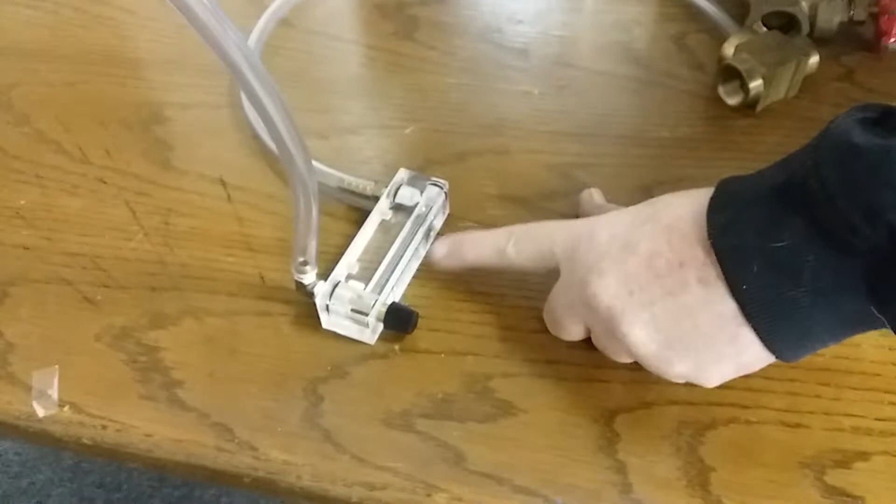Now we all know - I've got a drawing up here, but I'm going to go over a couple things so you get familiar with what we're doing here. Okay, so we all have a chemical injection jug, and we all have a chemical flow meter. This chemical flow meter has a shut-off knob and an adjustment knob, so you can adjust the flow, plus you can shut it off. If yours does not have that, you just need to put an inline needle valve right here between the flow meter and the jug. So then we all have water boxes, right?

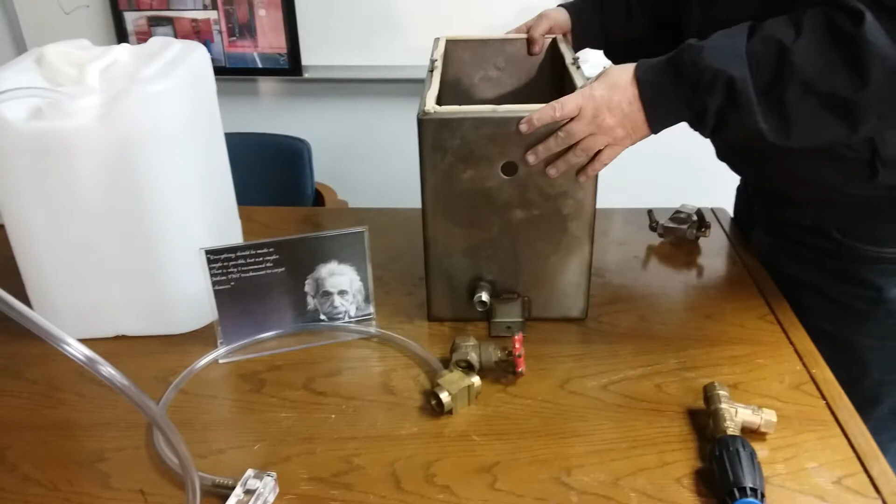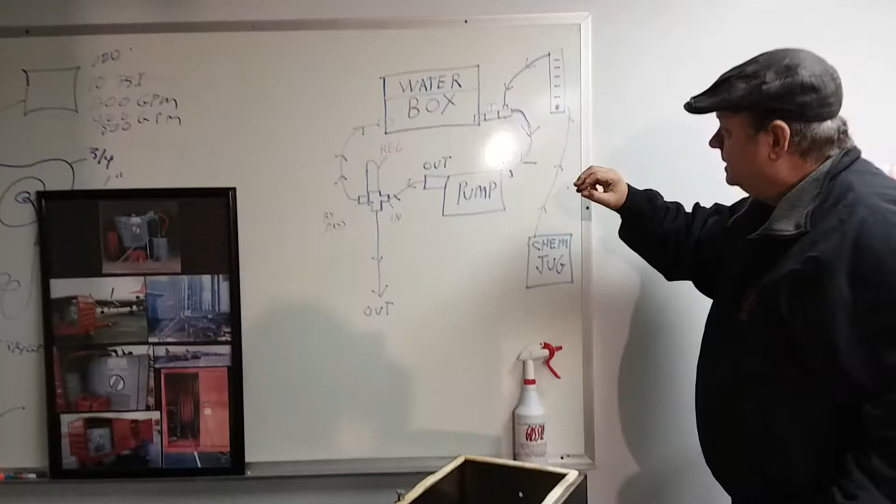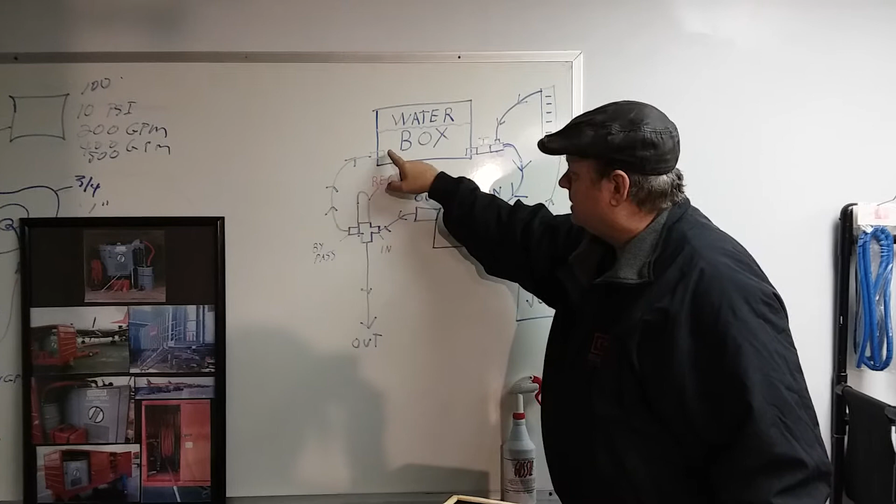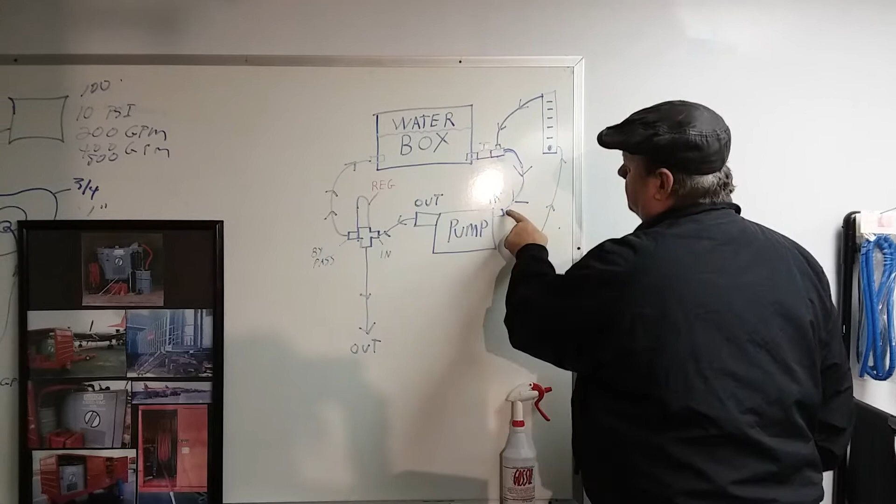On your water box, you're going to have an inlet going to the pump inlet, which will be the outlet on the box, and then you're always going to have a bypass line that usually returns back to the bypass of the box. Now sometimes on this drawing here, the bypass - here's the regulator, there's the pump out, high pressure out, then there's always a bypass, and we return it back to the water box. Now sometimes you'll see in a lot of designs is this way, guys - sometimes the bypass is coming back to the pump inlet with a T. Now I'll give you the advantages and disadvantages of doing that right there.

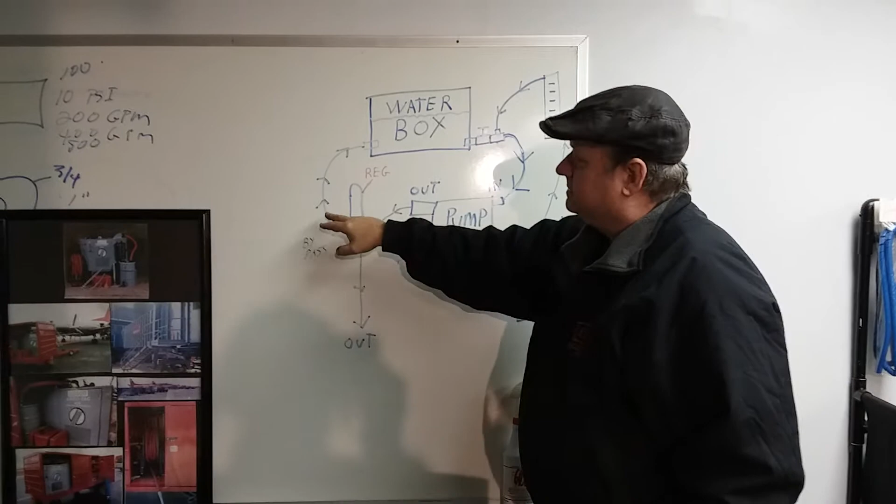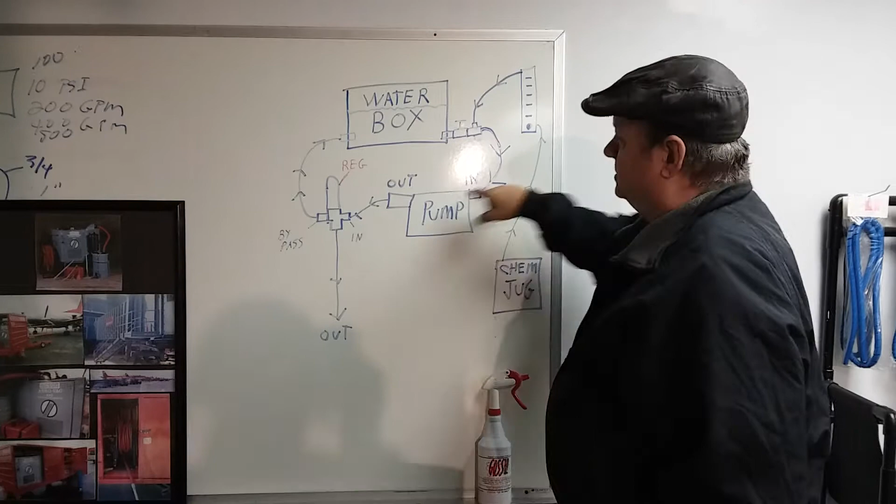If I bypass back to this water box, and this water box has 3-4 gallons of cold water, and it's just circulating - look at that, 3-4 gallons - you let go of the trigger, it goes into bypass mode, look at that, just flowing around 3-4 gallons of cold water. Well, let's say you're doing a flood job and the employee doesn't turn the pump off - well, guess what? No big deal, it's just circulating a bunch of cold water. So now let's say air gets in the pump - well, look here, it just blows it into this water. The bubbles just float to the surface, so it keeps the system primed.

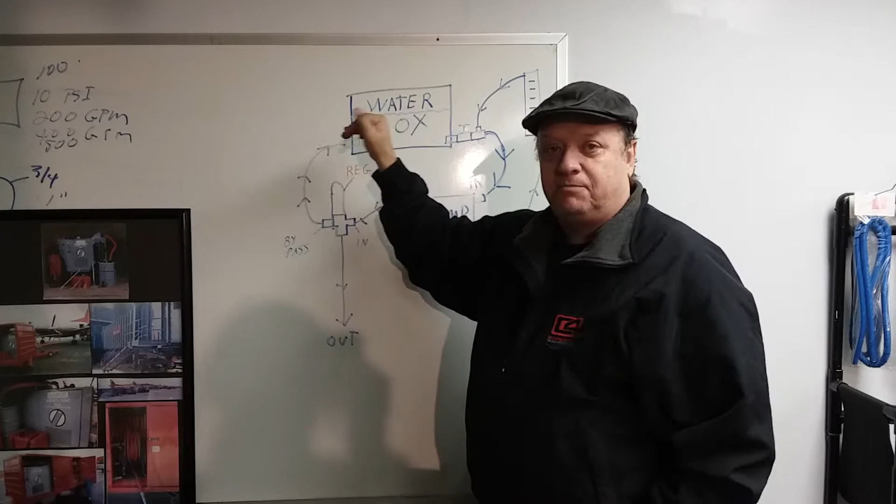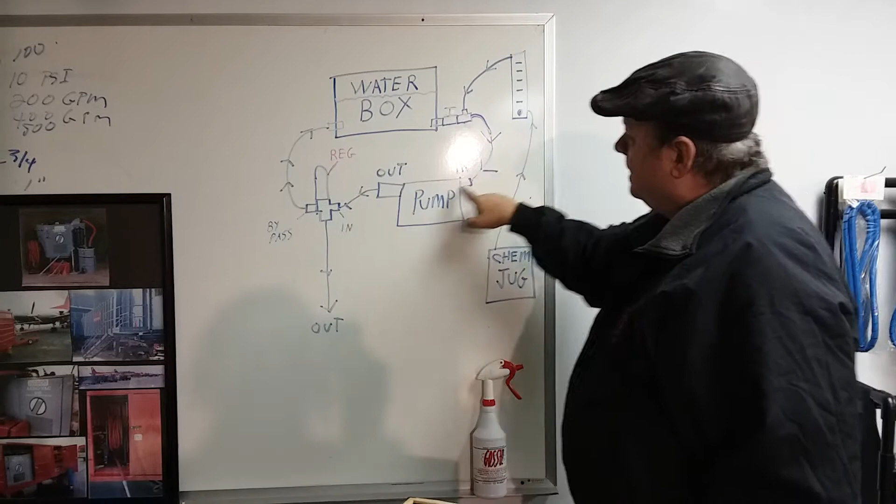If we're bypassing back to the pump inlet, we're now only circulating about 16 to 20 ounces of water. Every time it makes a pass, it starts getting hot, and it starts getting hot, so it doesn't take long to go to steam. That's why you'll see these inline thermal relief valves. But see, we don't even have that.

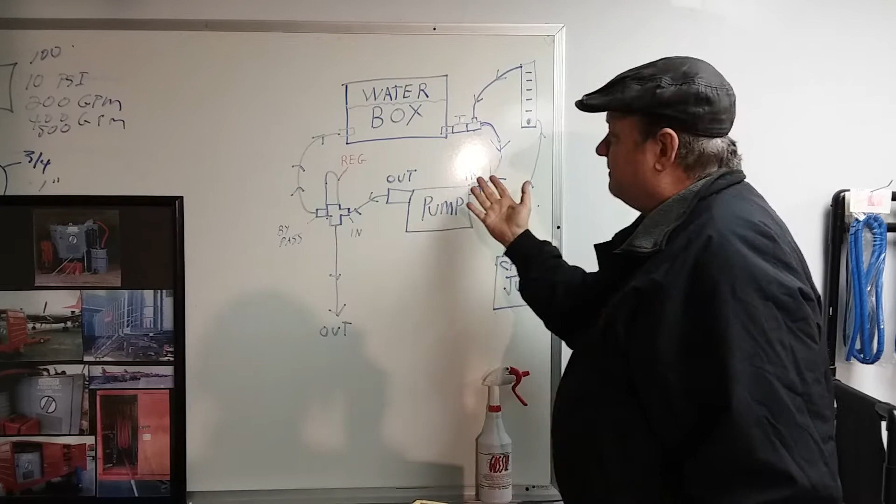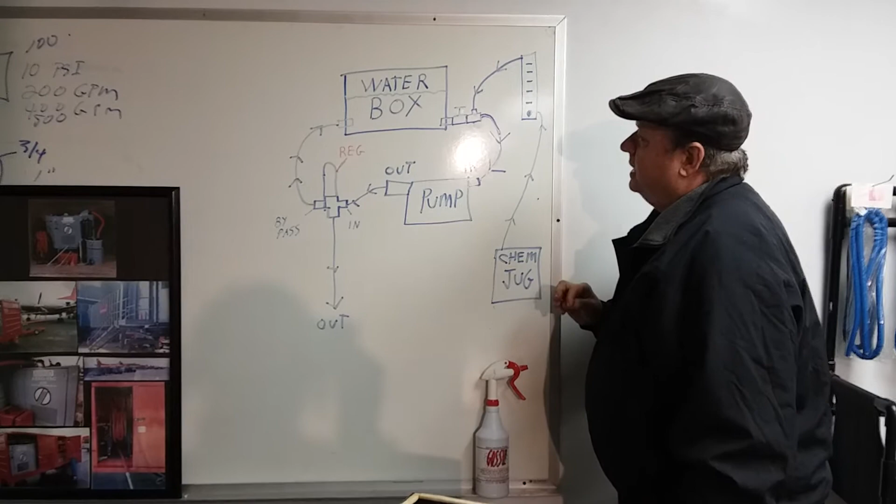So now, if we got air in the system, guess what? If we're bypassing back to the pump inlet, we threw the air right back in the pump. So this is the way we do it. And it's not the most accurate, but we're just injecting water softener.

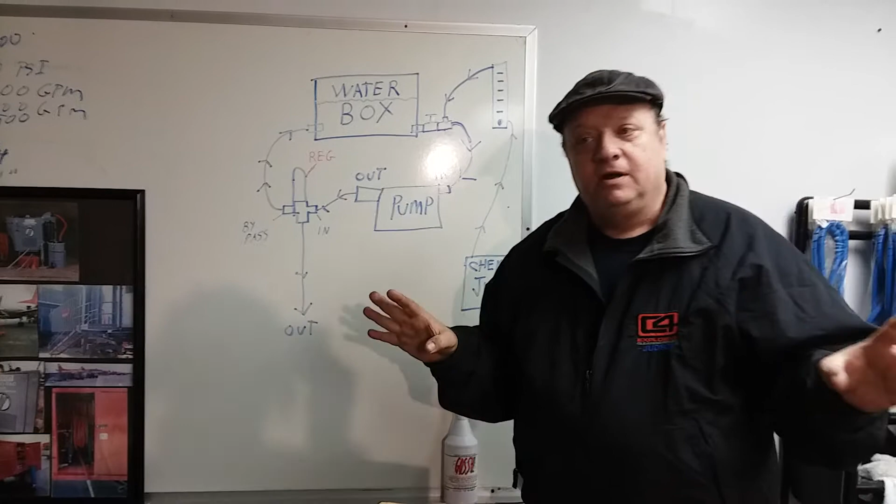We don't need to be running any acids in these truck mounts at all, ever. That's one of the issues I'm going to address this year, this acid rinse business of neutralizing the pre-spray. Obviously, you're not supposed to use a pre-spray that needs neutralizing. There's a reason why there is - it's because the cost of raw materials have gone up. And I can make you a gallon of high pH pre-spray for $3. I might make some to prove my point on this deal.

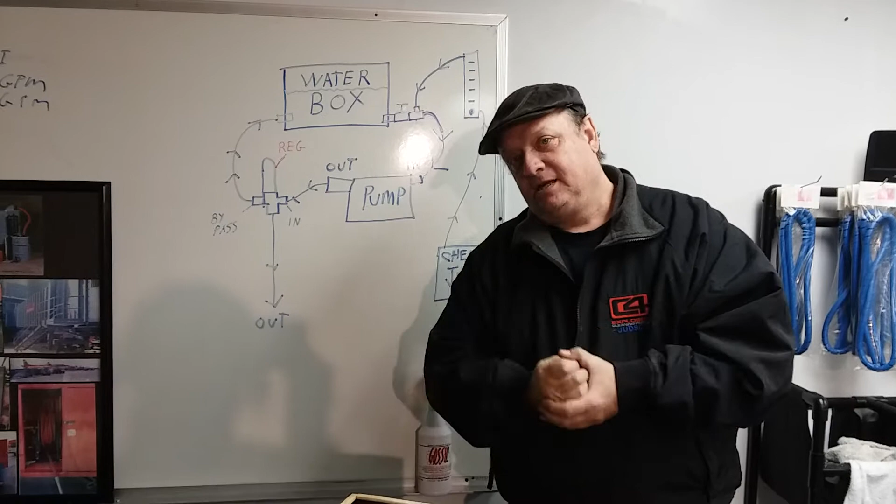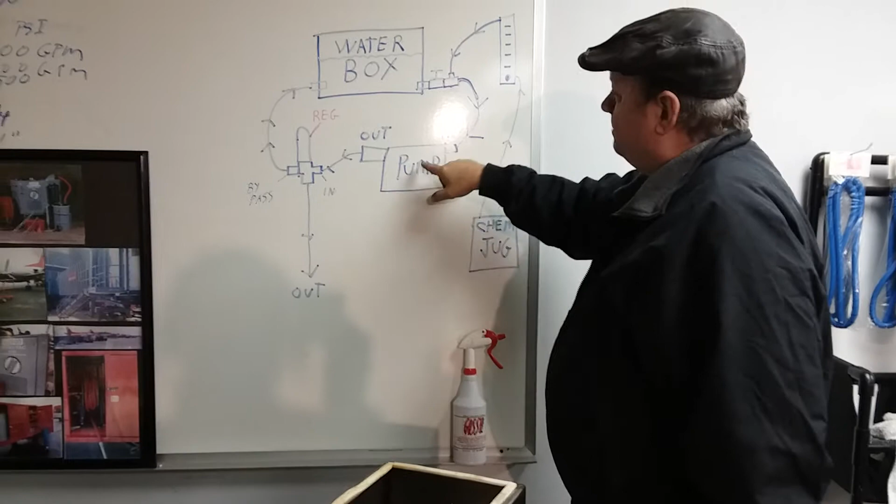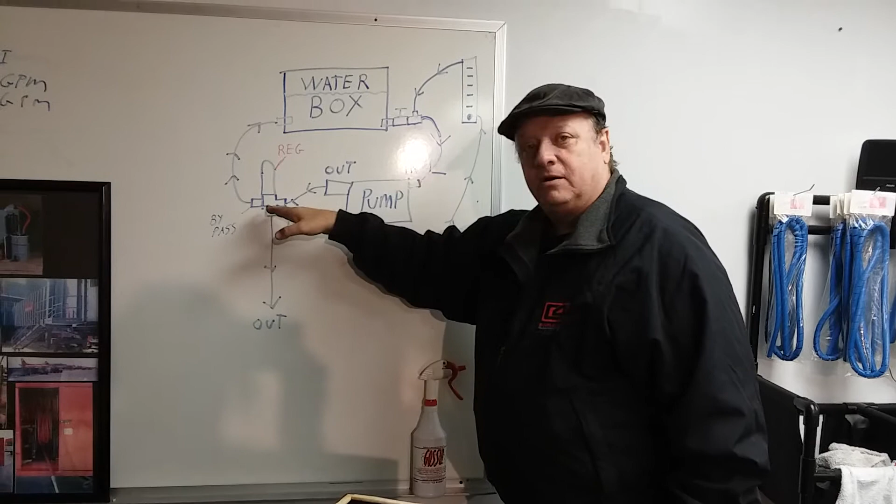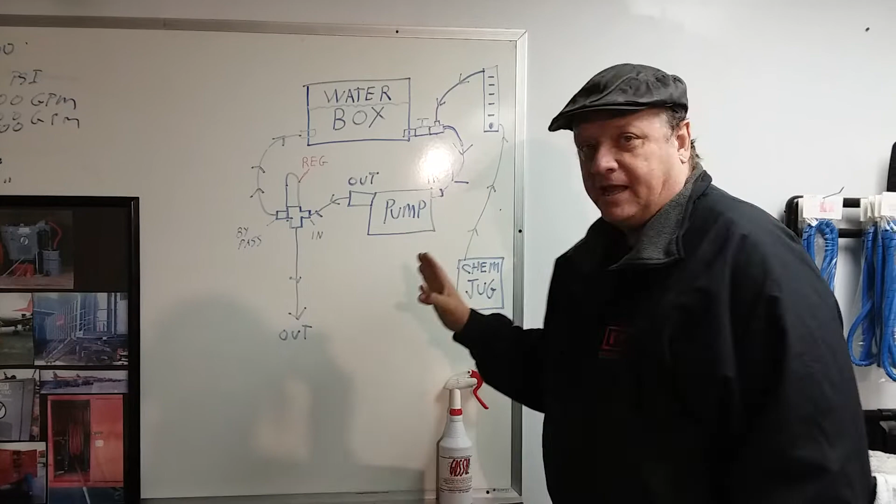But anyway, back to what we got here. So we want to run a water softener through there. Our water softener that we make lubricates that pump like a 2-stroke engine putting gas and oil together. That's why Judson offers a 10-year pump seal warranty and 10-year regulator warranty. That's because we are pumping cold water, it stays primed, and we're lubricating the pump seals and the regulator with our water softener that breaks down the surface tension, which is all you're supposed to run through a truck mount. I don't care what anybody claims - there's a reason they're claiming other stuff.

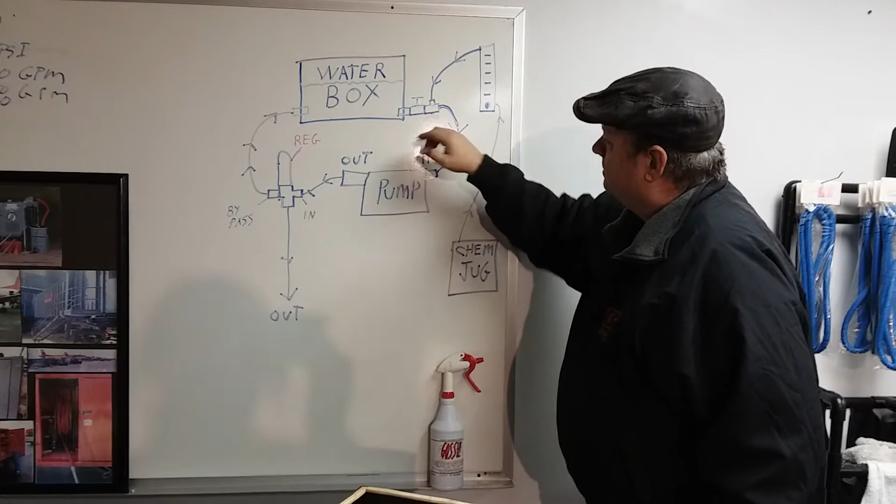Now here's the top of the flow meter. There's your chemical jug. You can stop this and just look at this, and then we're going to go over the resistance here that makes it draw the chemical.

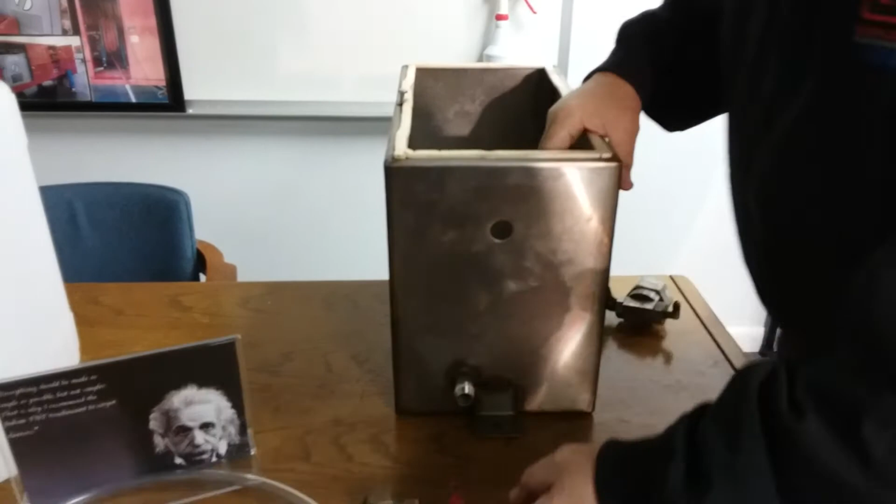So let's go back over here, down here. Now we have the water box. So what we do is we put a T on the water box, and then we put an adjustable gate valve.

Now look at this - this is from Home Depot. You can get these in different sizes. I just had it in the back. I was going to go get the right size, but I'm going to make the video. And you see how that just adjusts. So we put that in line, and then that goes to the pump.

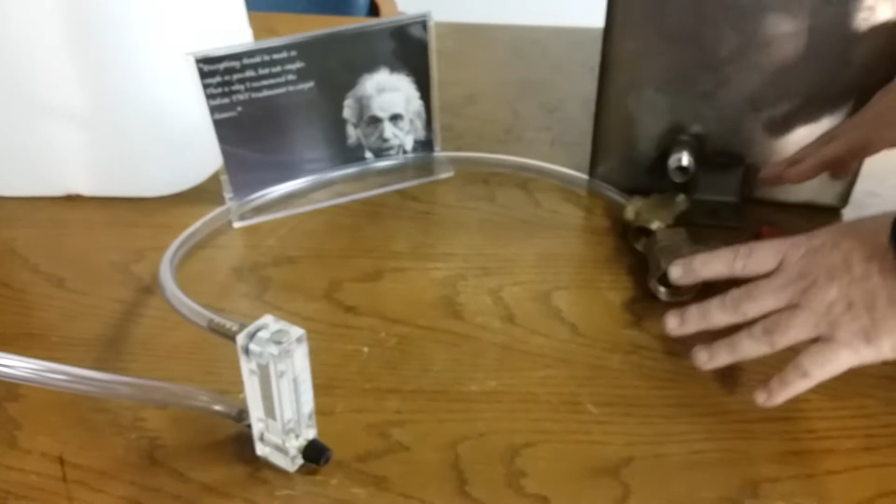So now we can adjust the resistance. If the flow meter is real sensitive, you can back this off and make it where it just barely goes to the top of 5. So this allows you to adjust for different flow pumps and also the sensitivity - it takes the sensitivity out of the flow meter. So that's how you put that little water valve in there, and then you've got an adjustment.

Now one thing I want to tell you about this - make sure you tighten this nut down right here. It's prone to suck air right through here and give you problems. That's the one thing I don't like about it.

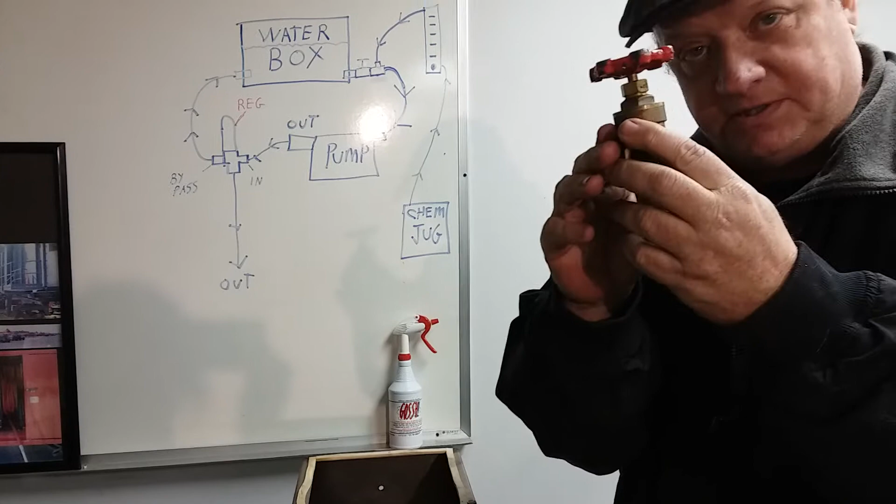Now, Judson factory truck mounts don't use these, but this is a great way of doing a retrofit of an existing system because we don't know what flow your pump is. Now let me show you what Judson does.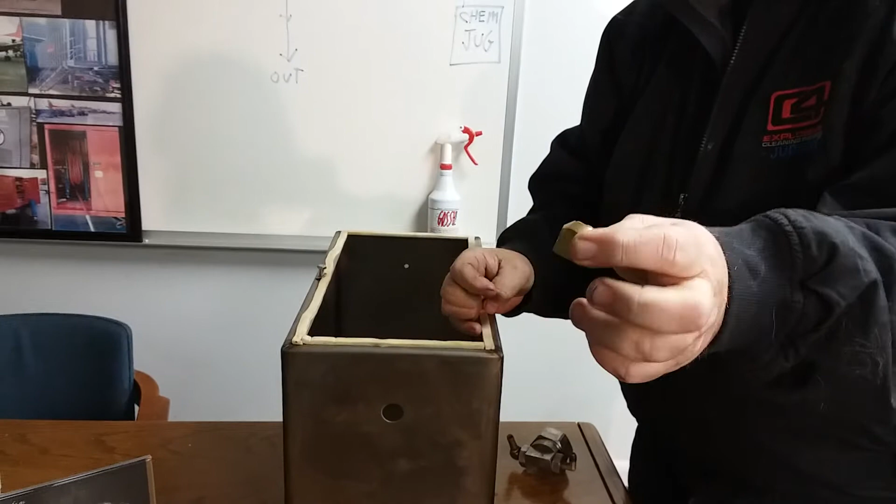Instead of using the gate valve, we have a preset on the inside where the filter is. I'll just back up a little bit. We have a hole drilled in this resistance, and that is what gives us a steady resistance. So we know what our gallons per minute is of the pump depending on the RPM of the pump and what the pump flows at, and then we adjust this hole to take the sensitivity out of the flow meter.

Okay, so you can do that too. You just start off with a small hole, keep drilling bigger until what you want is the ball just to barely make it to 5 or a little over. You don't want it to where you just barely touch this adjustment and it shoots up to the top - that takes the sensitivity out of it.

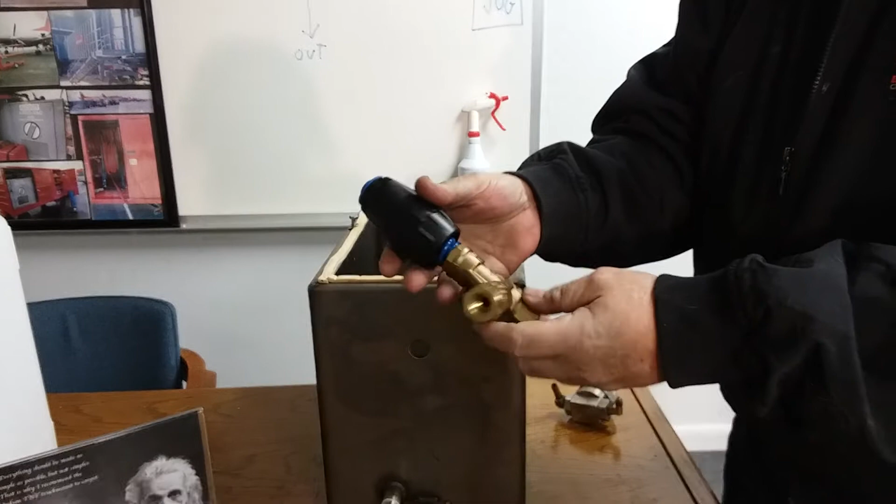You've got a regulator here - it could be panel mounted. Pressure comes into the regulator, and then we have pressure out, goes to the heating system - it could be a heat exchanger - out to the wand. Then there's our bypass. I was talking about returning to this tank, so it circulates all that cold water.

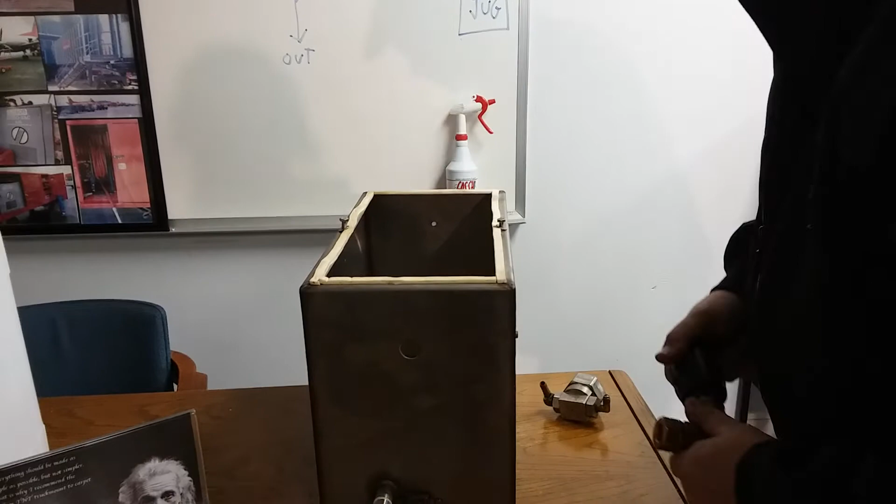So it's pretty simple. I don't know if this is going to help you guys or if it's real confusing. I'm trying to make it as simple as possible. I was going to get some different stuff from Lowe's or Home Depot - that's where you get these parts. That's one thing we like about it, is we get these parts from Home Depot or Lowe's, these fittings here.

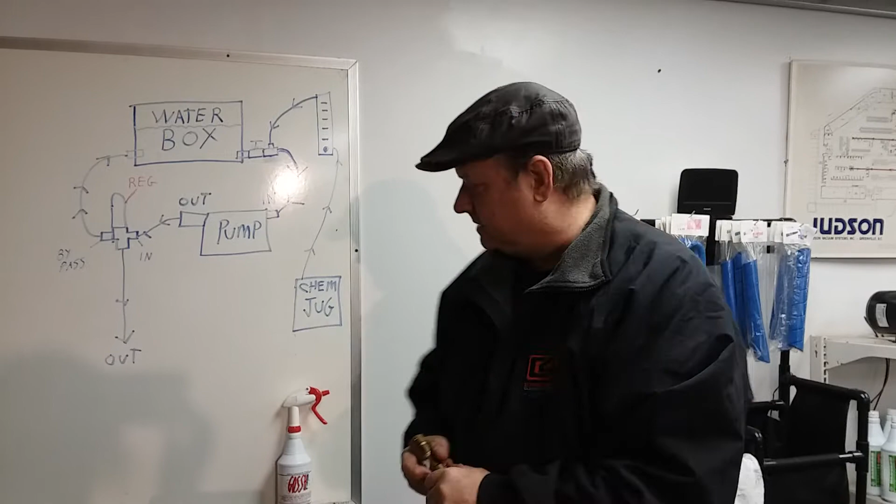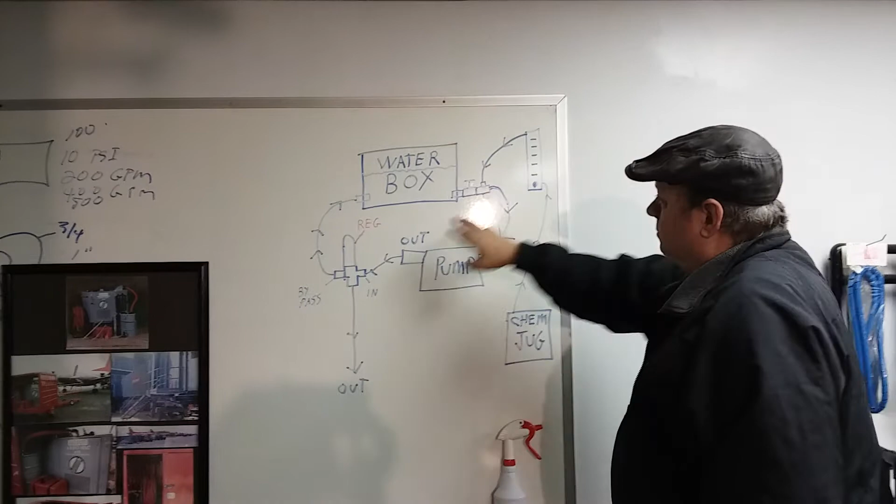So I'll go back over it. Got your water box, you know what the flow meter is. So we'll go back over it one more time, just real fast - your water box, you put the gate valve.

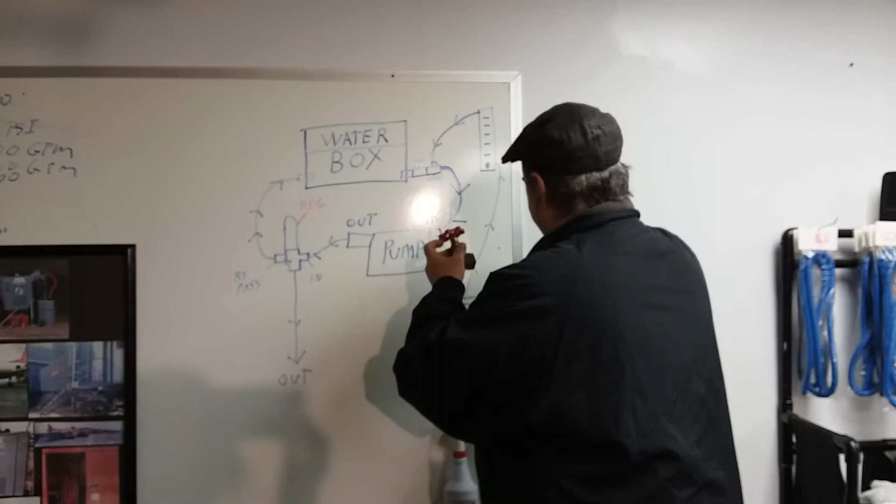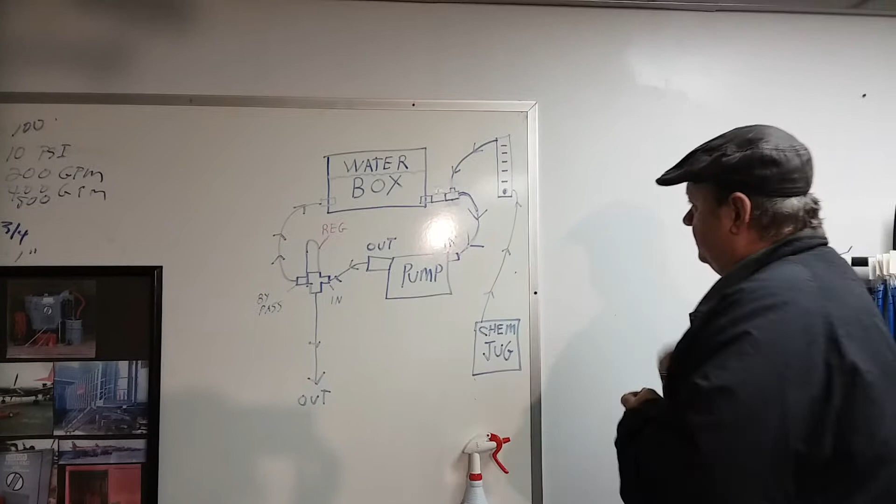Excuse me. Put the gate valve here. I got that drawn wrong. Anyway, the gate valve goes... let me see, no, I got it right. Yes, the gate valve goes first, then your T.

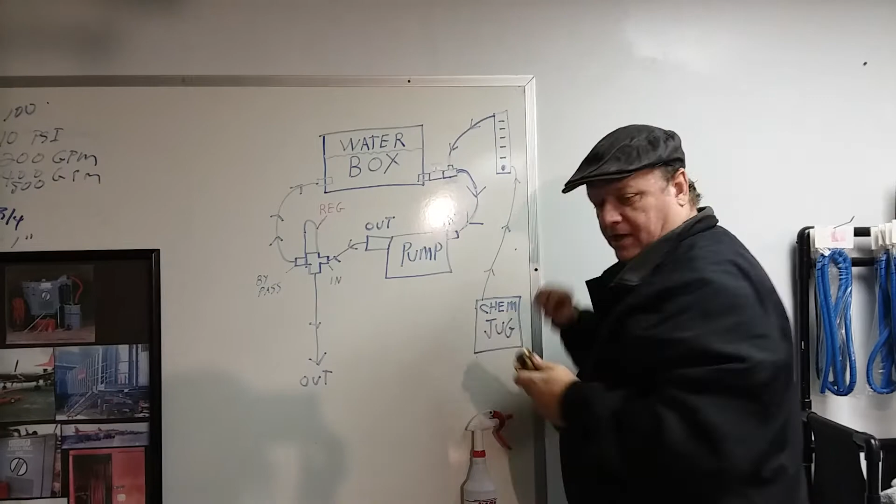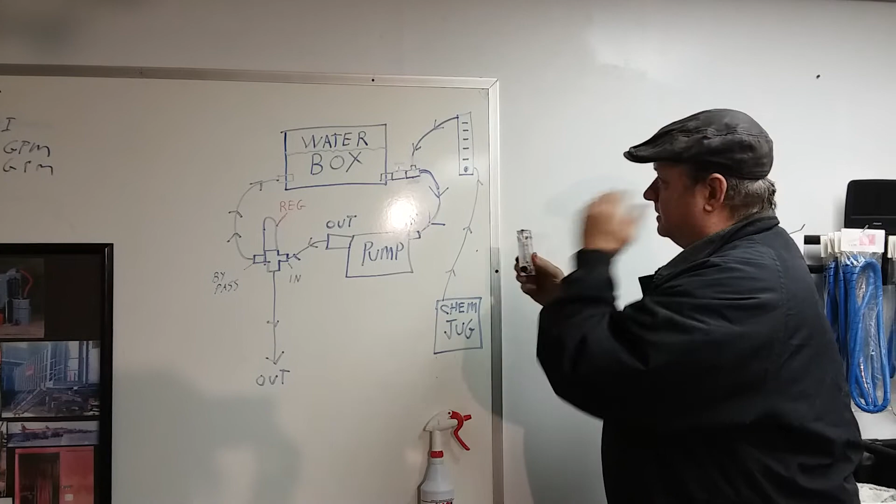And then this allows the resistance, and that's how you control the pull or the draw of the chemical out of here. Then you've got your little knob on your flow meter. Now, on the flow meter, you may not have a knob. You'll have to put a valve in line here to control the flow meter, the little needle valve. Most everybody's got it. You're either going to have a flow meter with a knob or without a knob, and usually they'll have some type of needle valve.

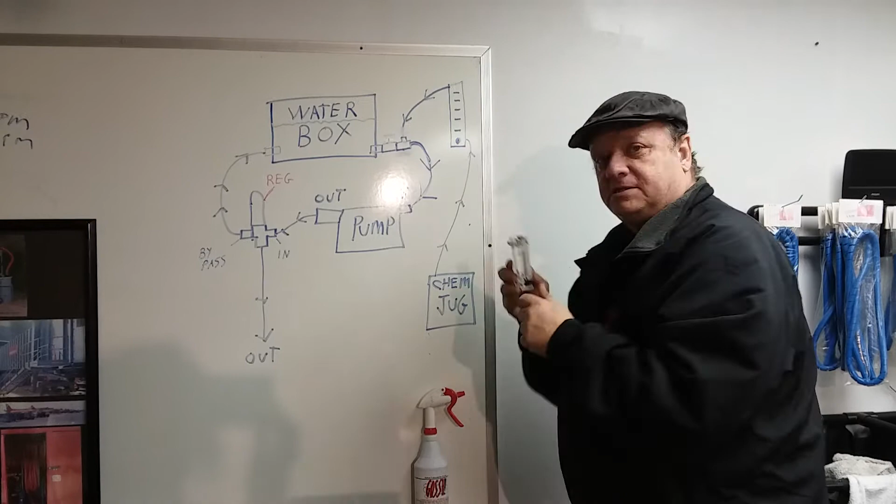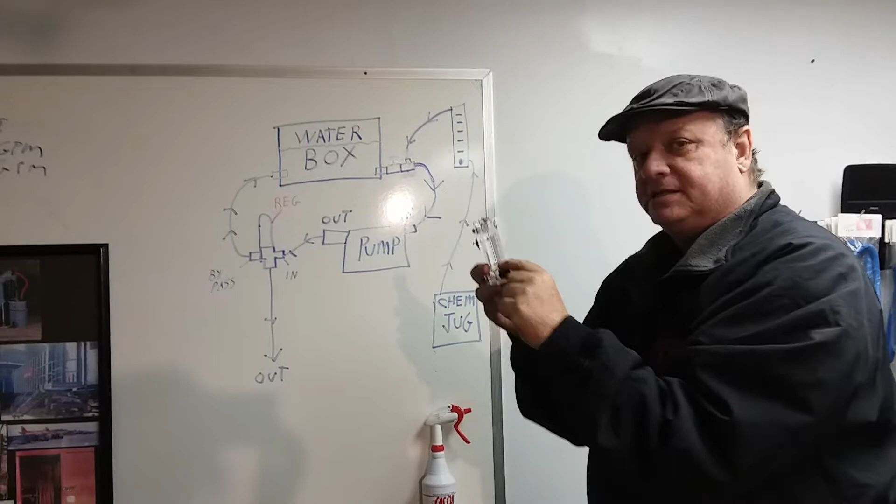Now, you are going to have to turn this off at the end of the day because it will siphon back into the system. This system does draw at all times. In other words, it's always going to draw, but we're injecting such a little bit of chemical per gallon. If you laid the wand down for like 30, 45 minutes, yes, it'll build up some strength in the chemical, but we're just running water softeners, so that's not going to be a big deal.

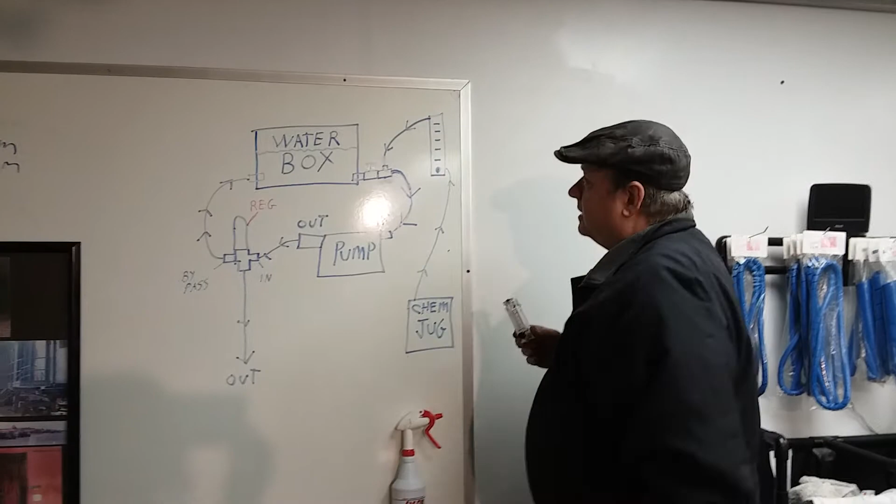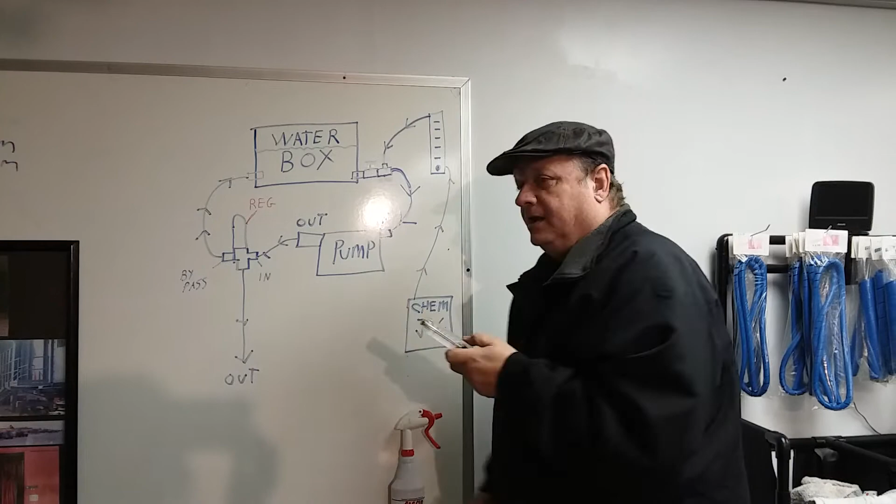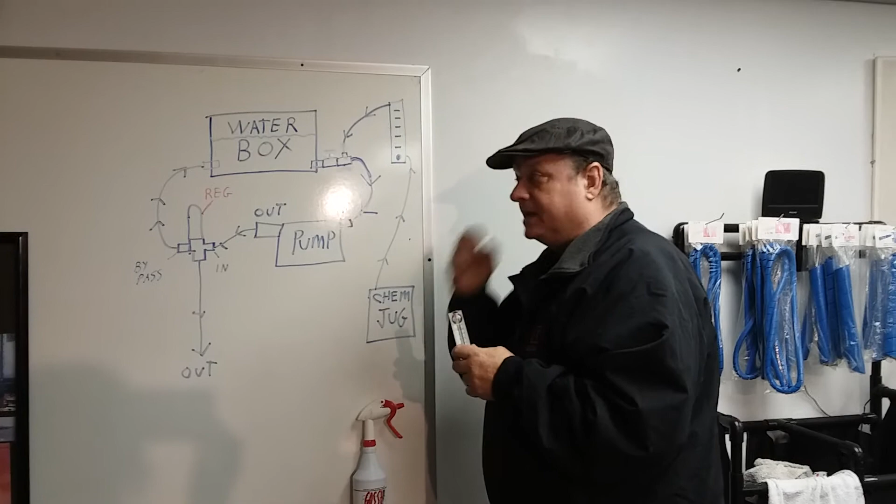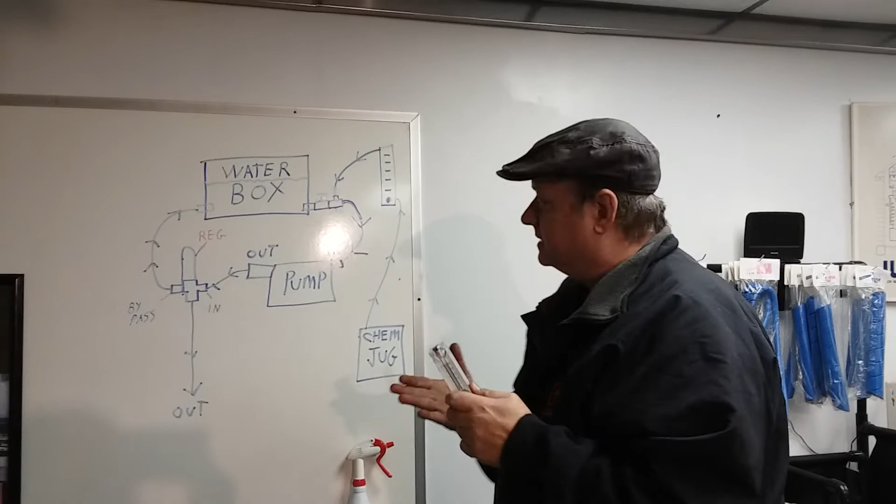Now, I do not suggest any acid rinses. I'll go over what that's all about, and it's about having the wrong pre-spray. Anything over like 9.8 is not a carpet cleaning pre-spray, it's a hard floor cleaner, and it should be used for a hard floor cleaner. You don't have to use high pH to clean carpets, but it's very expensive to manufacture a low pH chemical that performs, and that's what we specialize in, because that was the correct type of pre-spray. There's lots of stuff out there now, lots of caustic soda being pushed on carpet cleaners.

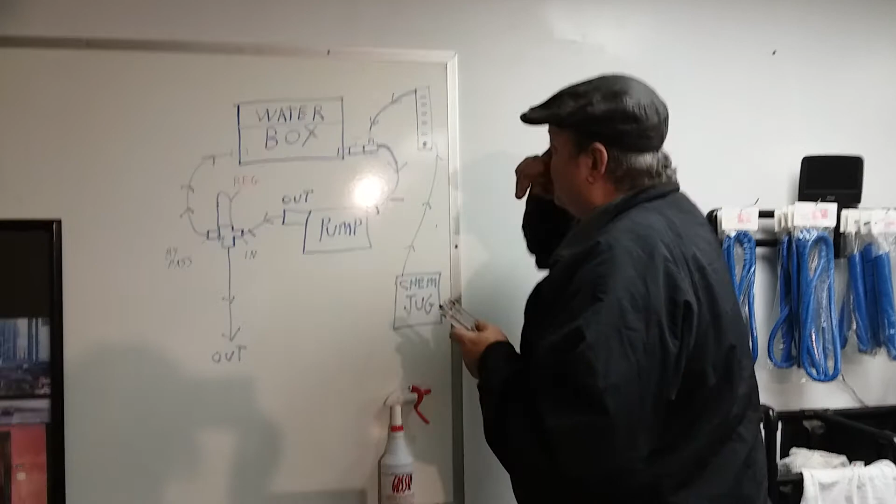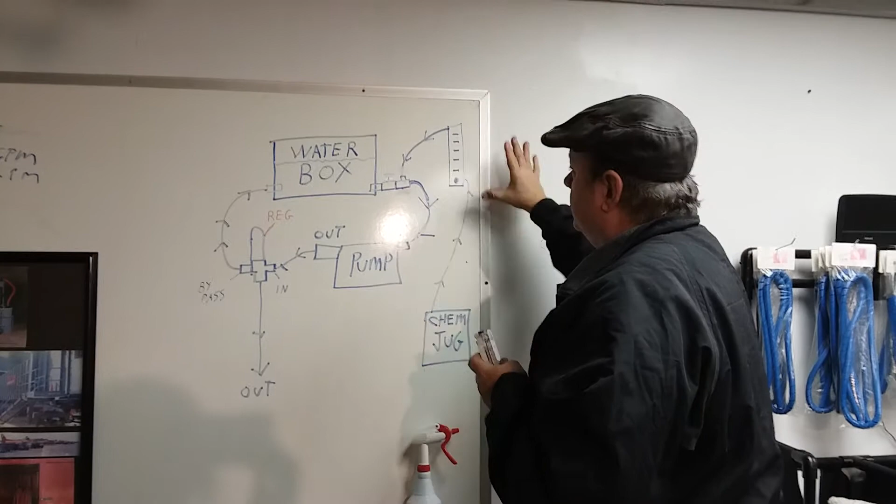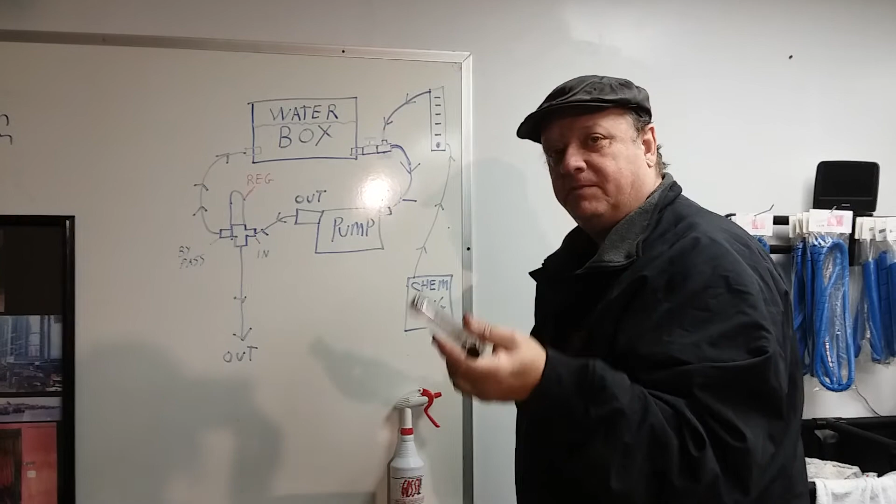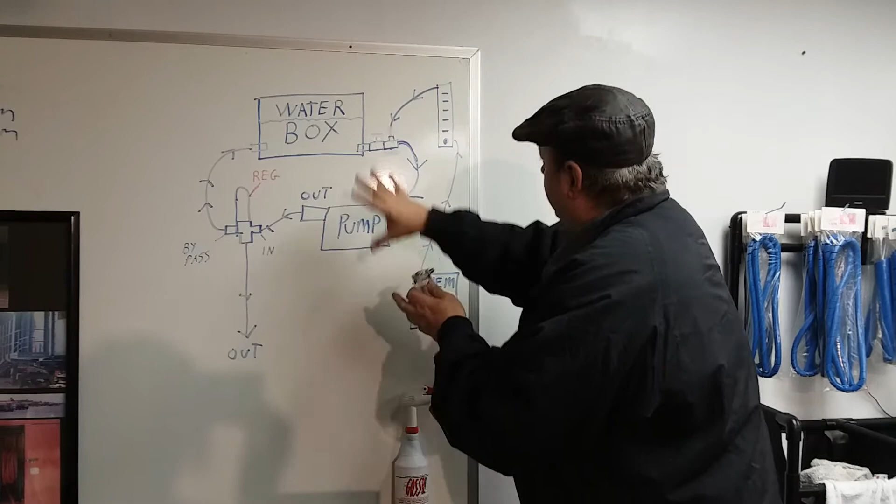So anyway, it does draw all the time, and you do have to turn this valve off or it will siphon water back into that jug. That's kind of a little drawback, nothing major, but the reliability outweighs the negative, the bad part. Somebody might say it draws all the time, but it doesn't really make a difference. We've been doing it since '65 and it's never been an issue, ever, so obviously it's not that big a deal. The reliability outweighs the fact that it draws all the time, and the reliability outweighs the fact that you've got to turn the knob off to keep it from siphoning.

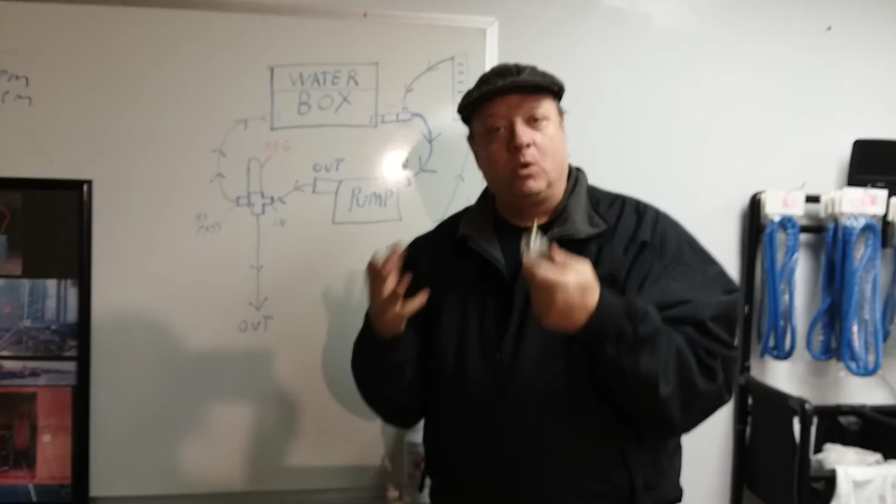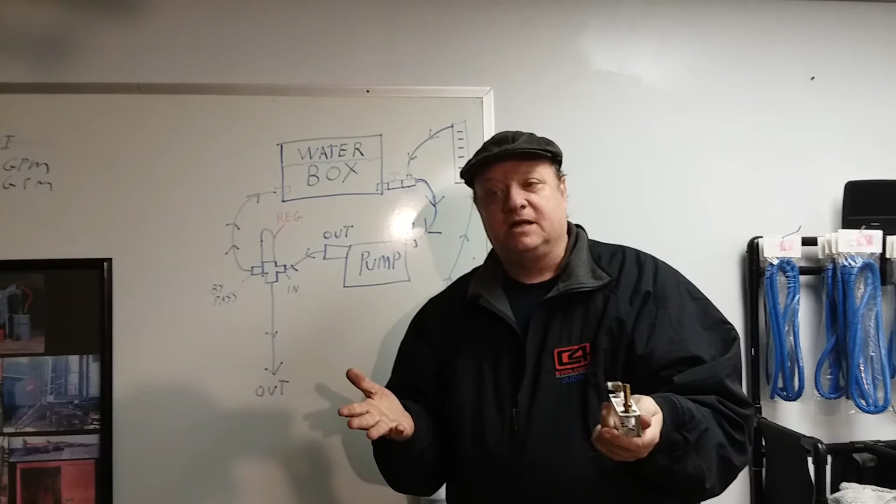Now, Judson has never claimed to be the most convenient system in the world. We're the world's most reliable and most knocked-off system in the industry. You'd be surprised how many people are directly knocking Judson off. You don't have to buy copies of Judson, give me a call, you can buy the real deal. We designed this, we've never copied anybody, we've always minded our own business.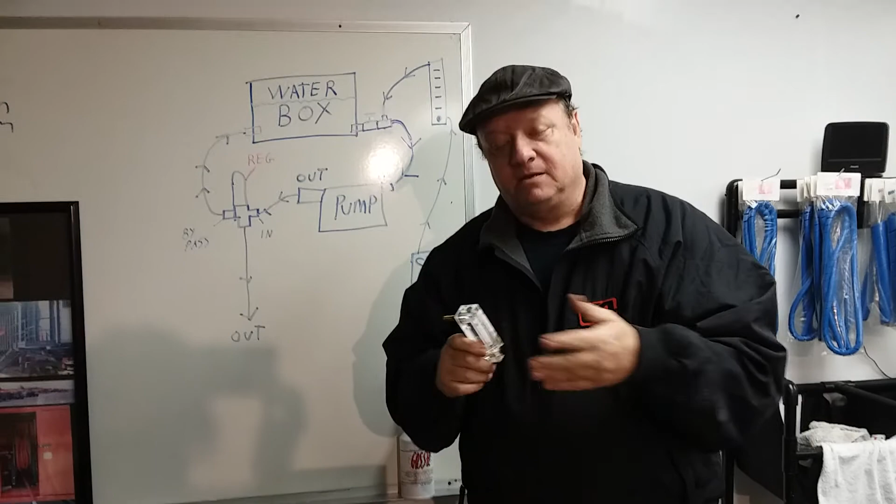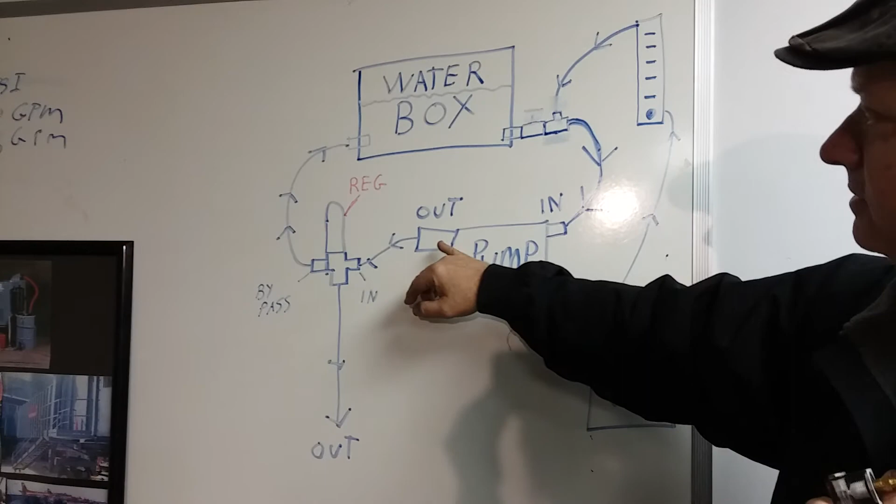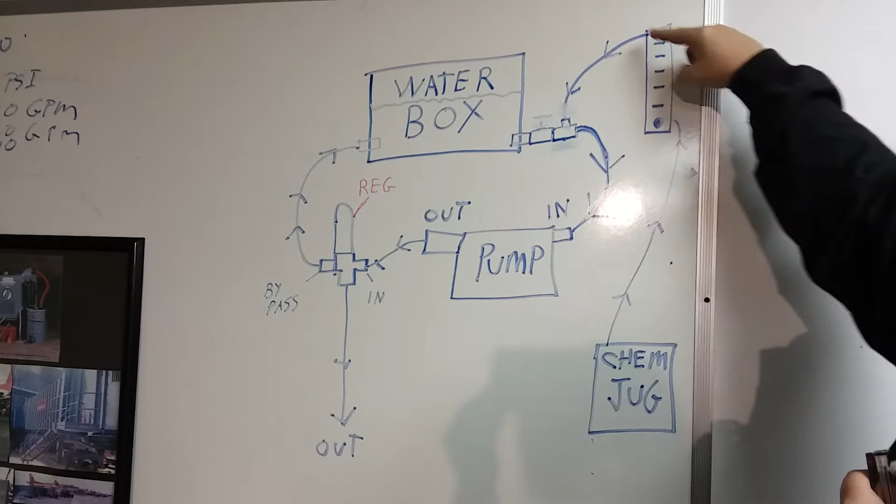So there's your regulator, bypass, out to the heat exchanger or wand. There's your pump—pump in, out, bypass back to the water box, outlet of the water box, resistance, adjustable water valve, T, top of the flow meter, from the jug into the bottom of the flow meter, pump inlet to the pump. See how simple that is? There's nothing to it, see there?